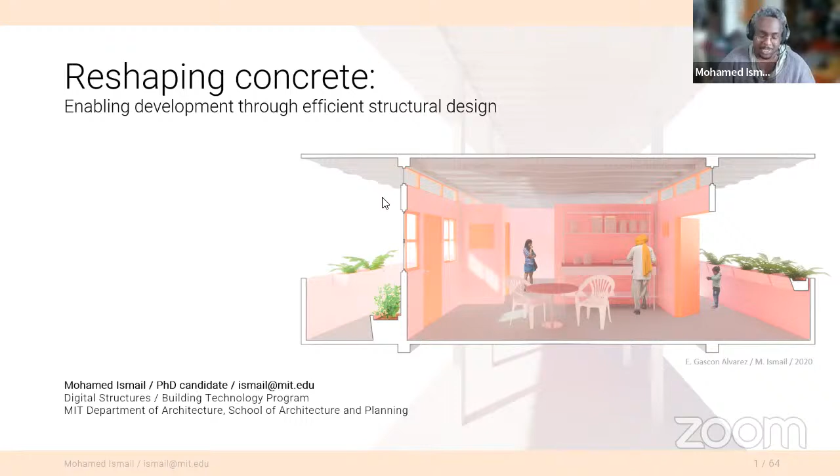And in the background, what we have is another common sight in Sudan, which is a concrete frame building with brick infill, and it's incomplete. To me, these buildings always kind of reflected this interesting dynamic of the desires for dignified architecture, yet the cost was so extravagant and outside of the means of most people living in this context that oftentimes it was not impossible to see them unfinished. So to me, they always felt a little bit like unfinished dreams.

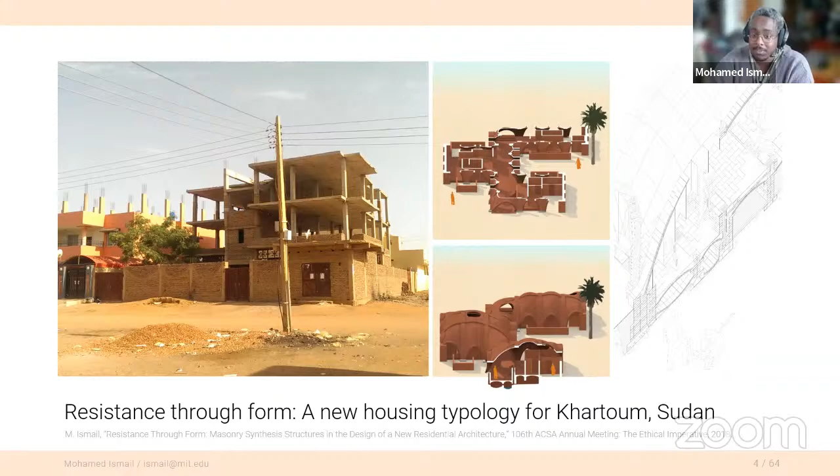And so I proposed a typology that used materials and structural systems that reflect the mechanics of those materials, but also was cognizant of the culture of Sudanese housing. Can it be arranged in a way that you have the public-private gradient, the separation of genders, and still call it something that is Sudanese, even if it doesn't look like what most people are building?

That same interest led me to my PhD research, which Zihan was very kind to introduce earlier on, which is basically the optimization design of concrete structural floor systems. And in my PhD, if you just wanted to jump to the end of what I've been up to, I've developed a shape optimization method that can reduce the embodied carbon and mass of residential floor systems by over 60%. And we're talking about multi-story concrete brick frame buildings that are going up in less economically developed countries like Sudan,

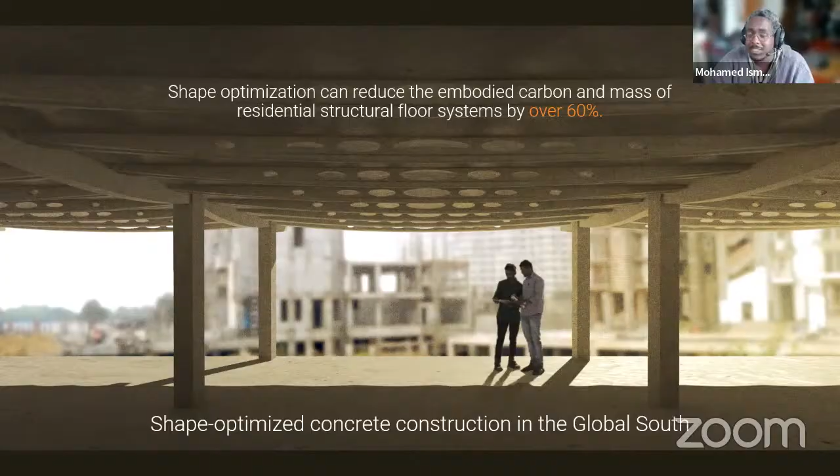India, et cetera. Some of you may be familiar with the embodied carbon aspect, that this is the carbon that's associated with the material extraction, material processing, material construction and deconstruction. And you might know that the construction sector contributes to 11% of global carbon emissions. Most of that is due to concrete construction. So 8% of our global emissions are due to cement.

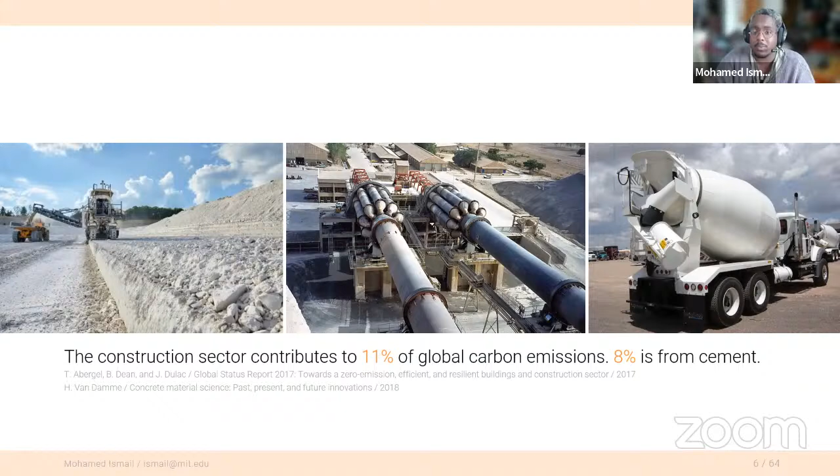And what I want to point out is that because of this growth, building-related emissions, just like the impacts of climate change, are not shared equally. In developing countries, construction can contribute 2 to 3 times as much as they do on average across the world. So with the ongoing climate crisis and the sensitivity of these regions to climate change, this does require an immediate response.

Now, in response, I focus on floor slabs, which might seem somewhat pedestrian and uninteresting, but they actually occupy a lot of space and mass in construction, especially because most of our floor systems are deployed using materially inefficient practices. This is an informal survey of housing construction that was being done in India when I started my research. And you can see that most of these structures are being built using prismatic beams and slabs, rectangular prisms.

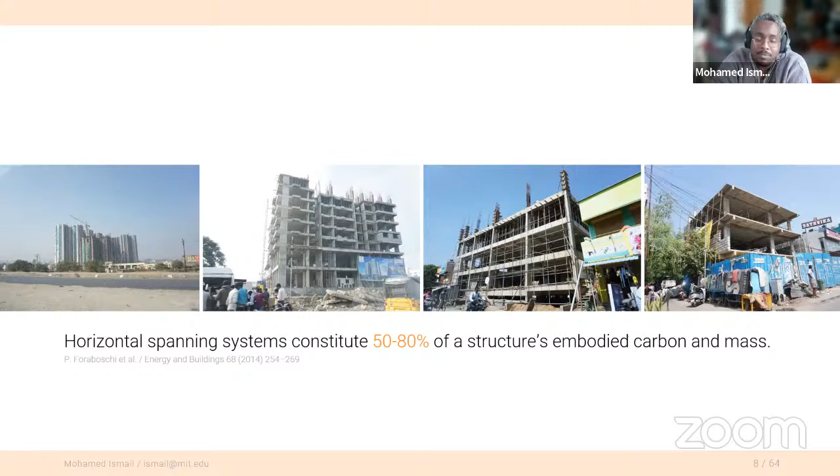In fact, they make up at least 50% of the mass and embodied carbon of a building structural system, and it actually goes up the taller a building gets, which is becoming more and more the case. To illustrate some of the arguments that I make with my research, here's a diagram of a one-way concrete floor slab that spans across 2 beams that are about 5 meters apart.

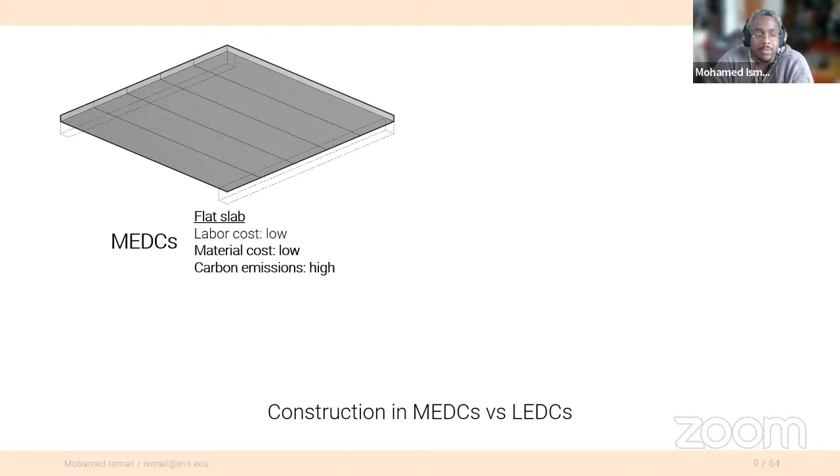In an MEDC, or a more economically developed country like the United States, which is where I reside, we build a lot with flat slabs. And that's because material costs are low, so we're not too worried about inefficiency, and this keeps labor costs low, even though our carbon emissions associated with this type of construction are relatively high. So if we were to propose a shaped slab system like this that was developed using an algorithm that I developed, labor cost goes up and it becomes far less feasible to build something like this, even though we can argue that the carbon emissions are substantially lower.

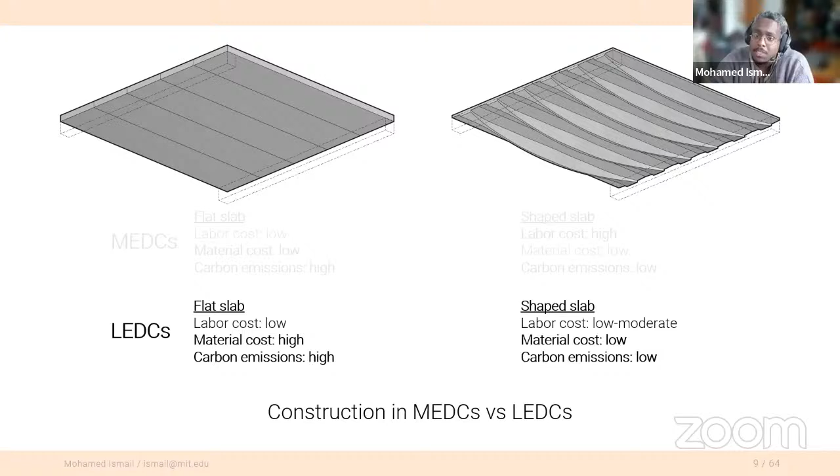Whereas in less economically developed countries, we still build using flat slabs, even though material costs are so much higher than they are in countries like the United States. And labor costs are low regardless. And so the carbon emissions remain high. And so if we were to propose a shaped slab system, labor costs might go up a little bit, which actually might be a good thing. We're shifting the cost for materials to human well-being and lifestyle and livelihood, while reducing material costs and reducing our carbon emissions simultaneously. And this is really all enabled because of the cost breakdown of residential construction.

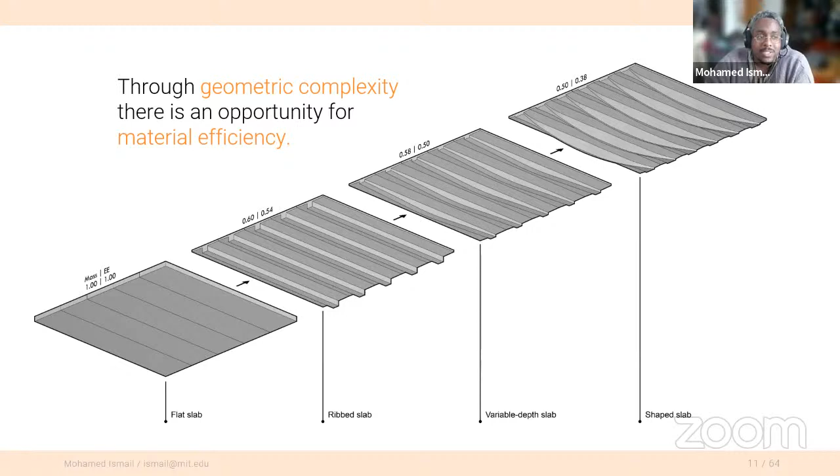In the United States, we're about 50-50 between labor and materials. But in places like India, materials can account for over 80% of residential construction costs. So why are we still building using these materially inefficient methods that were developed to reduce labor rather than material? And I argue through the research that geometric complexity offers an opportunity for material efficiency. This is not a new idea. We have a lot of industrial prototypes that have showcased how you can remove material through some efficiency to a certain extent. But these are systems like waffle decks, bubble decks, hollow core slabs.

They require infrastructure and they require a huge investment in capital for countries. So places like India, once again, where I spent a lot of my time, this is not totally feasible. They're slowly gaining traction, but there's a lot of investment up front that needs to be done to make these happen.

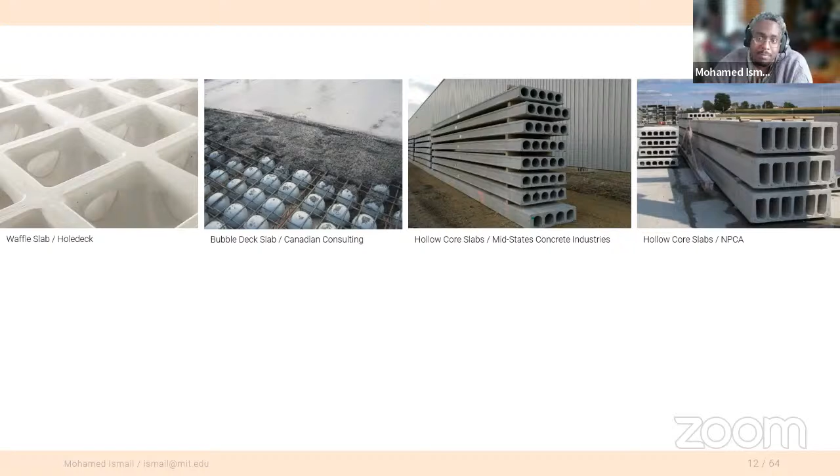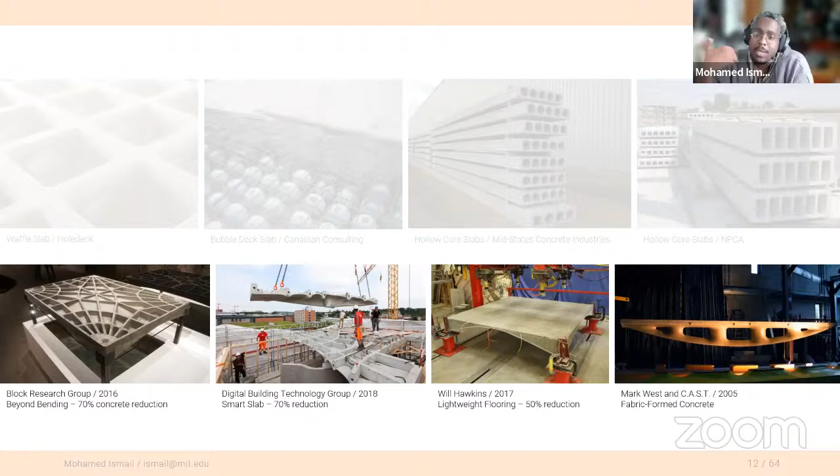In academia, there's a lot of really exciting, beautiful examples of materially efficient systems that have been developed by some of our colleagues, but they often are done using digital fabrication methods that are not available or materials that are not actually allowed by code or not standardized to a certain extent. So these are systems that might gain traction within a few decades, but not immediately accessible.

And so in response, I'm trying to do something in between. Can we do something that pushes the accessible technology and standard materials, but is still reasonable for construction in the next 5 to 10 years? And I focus most of my research on residential scale construction because that's where most of the concrete for building use is expected to go. And ultimately trying to reduce environmental and economic costs without increasing the complexity of fabrication too much beyond what is possible.

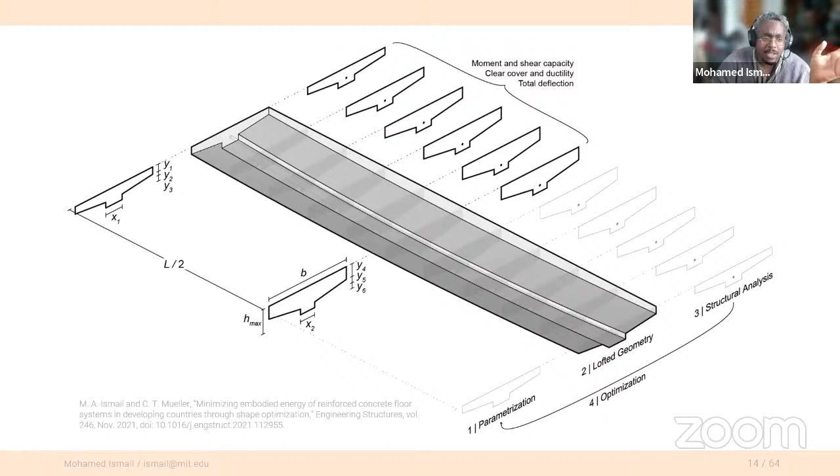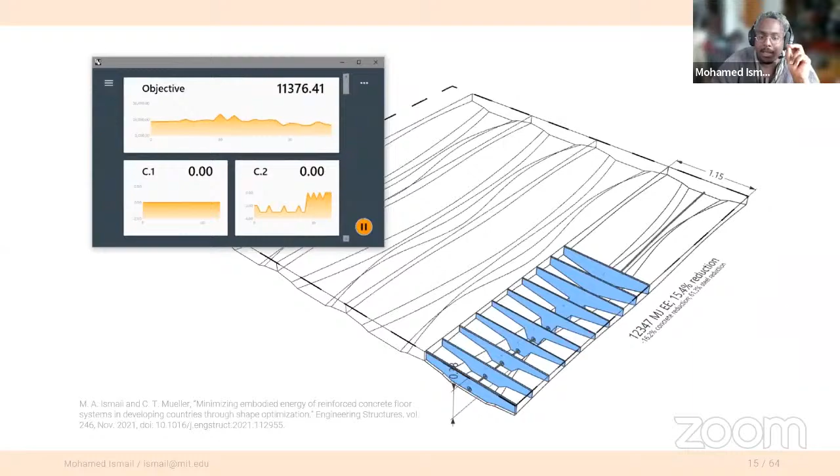The shape optimization method looks like this. We basically define geometry, analyze that geometry, and then run a constrained optimization. And the separation of the analysis and the design of the geometry allows for a lot of flexibility, but this is what that shape optimization method looks like.

And we were lucky enough to have an opportunity to build several examples of this. One of our biggest ones was a 15-foot beam in New Delhi, India, with our partners Tara, who built it and also tested it in a government lab to verify that it behaved the way we wanted. It met Indian standards and was still 50% less embodied energy when compared to a standard floor slab.

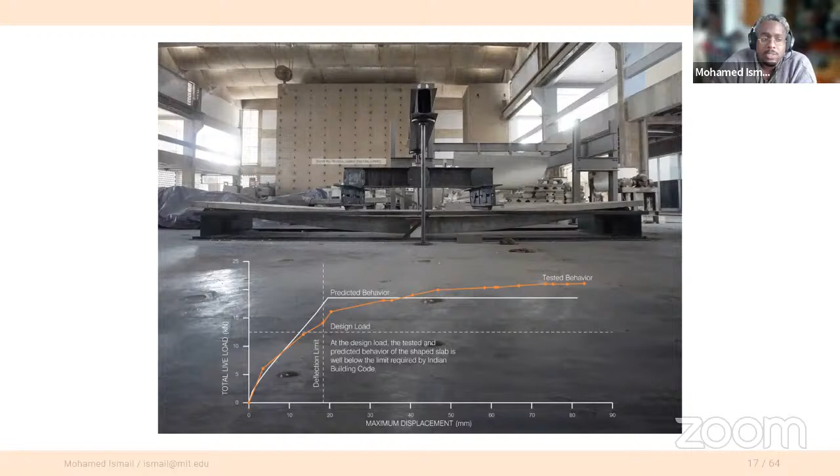And it just did very subtle shaping, built using a formwork material like steel plates that were regularly used in India nonetheless, and was substantially cheaper when you look at the actual total materials. Now we're really excited. We're getting to look at other regions. This is a proposal that we're developing in Mexico City with partners to basically make subtle changes to a system that they already use that's both precast and cast in place.

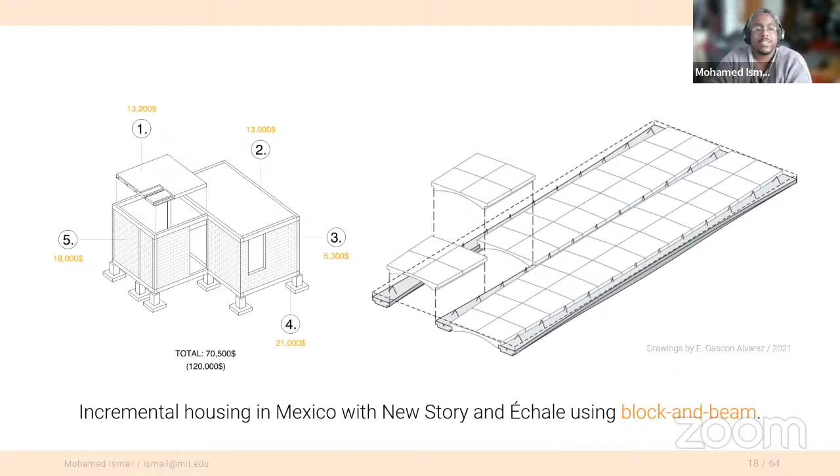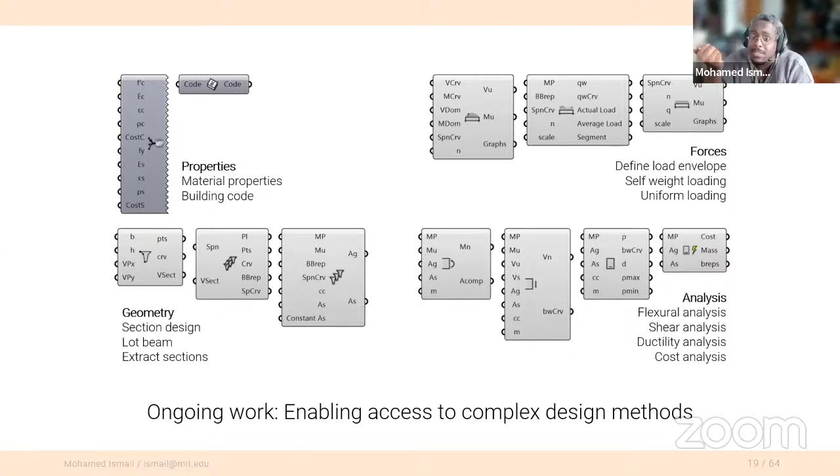I've also been thinking a lot more about how this research can go beyond the lab. Can we actually engage other people, and that means making these methods accessible. So I've developed a plugin for the analysis and design of complicated concrete structures, which means that we can pair this with things like virtual reality and machine learning in order to have predictive models so that someone who doesn't fully understand how concrete mechanics works can still mess around with the design and optimization of these spaces and understand the implications of all of their design choices early on in the process. So how can we actually include the end user in our low carbon design processes?

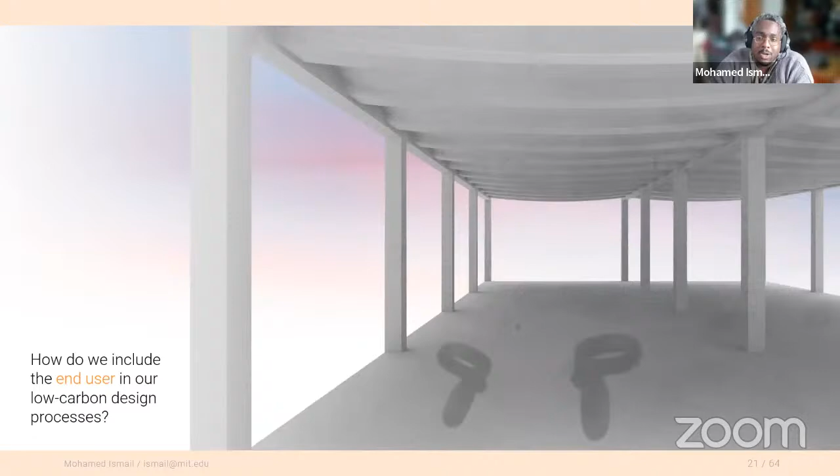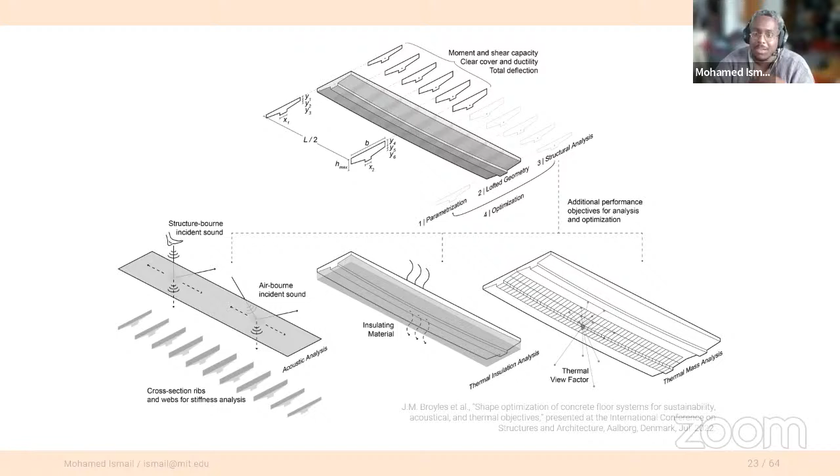It's also allowed me to take my method of structural optimization and bring in other partners who can talk about performance metrics outside of structural behavior, like thermal behavior, acoustic behavior. This is work I could not explain, but a partner in Penn State has done amazing work trying to figure out how you can optimize for both sound insulation and structural efficiency.

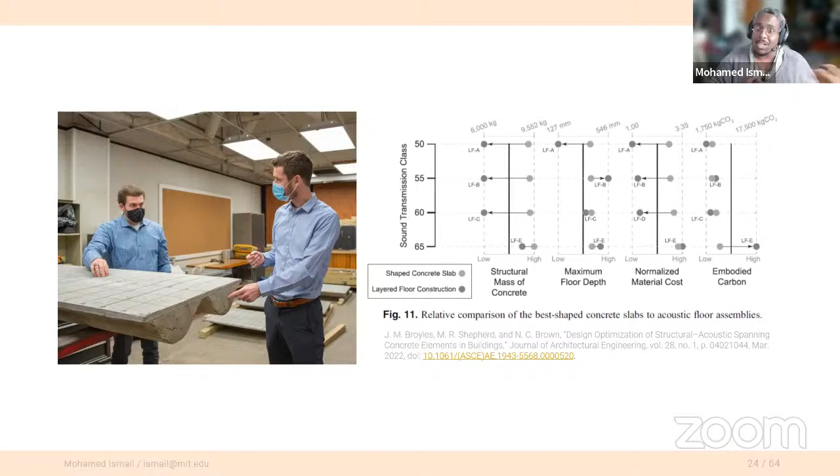Or can you do lifespan operational energy where you're using shaped concrete slabs to store thermal energy and heat and cool a building passively throughout its lifetime, where in a place like Cairo, you could actually reduce the total energy of a 50-year lifespan for the building by 60% just by shaping your concrete floor systems.

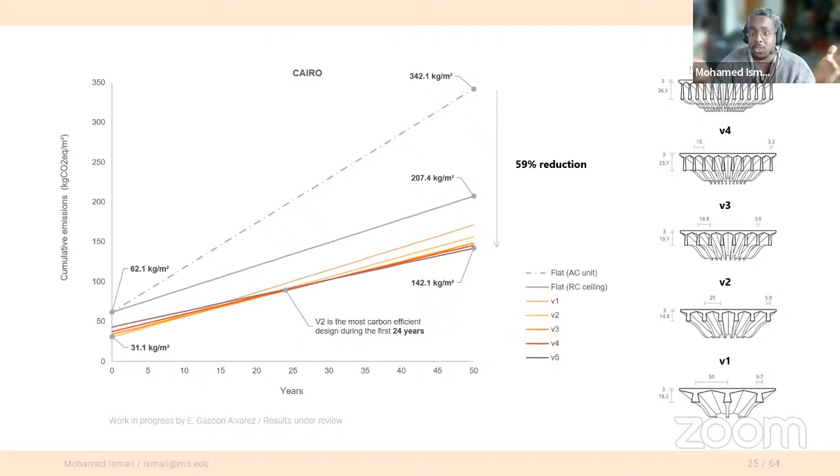So to summarize, some of the lessons that I've learned in my research is that sustainable construction needs to question our most common practices. I think that's kind of an obvious question to a lot of us. Holistic design has to occur across various performance metrics, which include space and aesthetics and human well-being. And we need to be able to work where we can have the greatest immediate impact.

And for me, that's been a lot of the developing world, but really low cost and low carbon solutions are needed worldwide, which is extremely important when we think about how there's a vast difference between climate responsibility and climate vulnerability. It's almost the inversion. And there's a wide gap between those who need help and those who get it, even in our own neighborhoods. So I think it's both in our best interest and frankly, a moral imperative to respond to the needs of the majority through innovative design and technology.

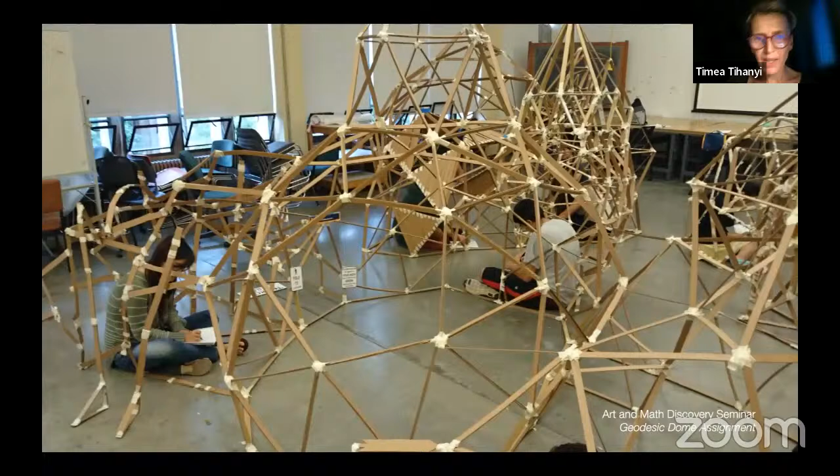Another aspect of the art and math class that we all enjoyed was a Buckminster Fuller geodesic dome project that the students were building out of cardboard and tape, and they really had to understand how structure and ideas of tension and compression worked. We also use in the classroom, and this is not an art and math class, this is just a regular making class in sculpture, ideas of topology.

So here the students are putting on t-shirts and stretching them out with internal structures, and really creating ideas of shape and volume by transforming the shirt itself.

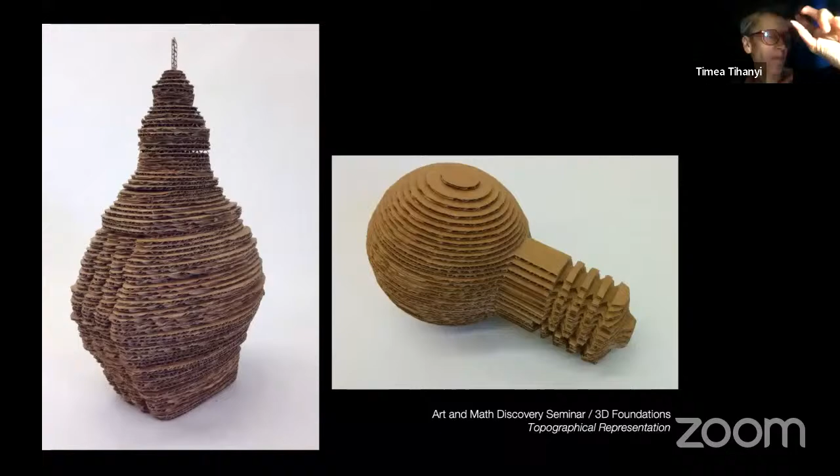Another type of project that we often do in sculpture classes is topographical representation of objects, and I've been teaching for 20 years, so this was one of the early projects that we were doing in a sculpture class.

And at that time, I wasn't thinking of 3D printing, but of course now, conceiving how an object would be built up from layers, individual layers, and what the outline of those layers might be. That is the kind of thinking that this project practices.

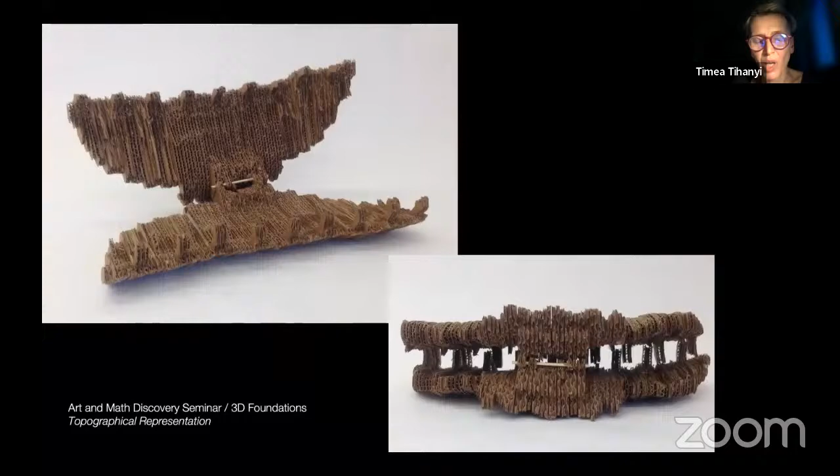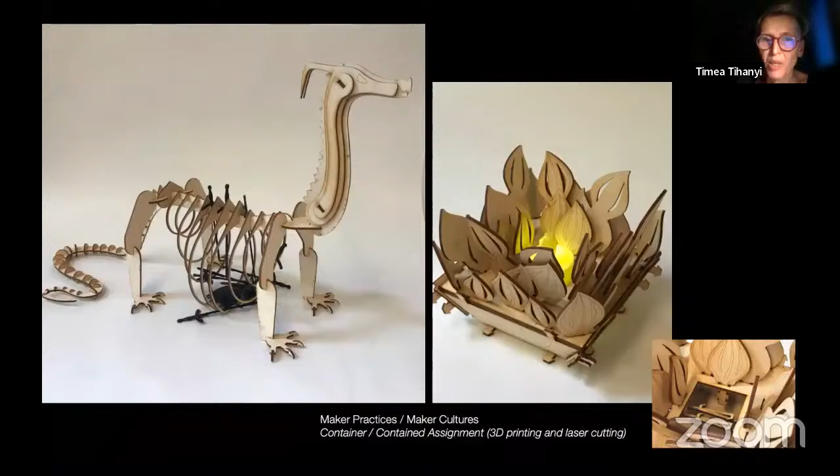So in a more recent class, which is called Maker Practices, Maker Cultures, we are using various methods of fabrication, so laser cutters and 3D printers, to do similar projects. And I really love the way the students are creating the shape, creating the volume by slicing things and joining things differently. And then lastly, this is the last batch of student projects I wanted to show you, because this actually brings us to my work.

So besides the university, I also run a 3D printing studio that specifically focuses on ceramics, and this is Slip Rabbit. The studio's goal is mentoring and research in the area of clay printing, really seeing where clay printing can be expanded into interdisciplinary, cross-disciplinary areas, and how it can be used and how it can be pushed further.

So the studio had the first students come in 2017, and we have internships, collaborations, and residencies. And we'll see some of those examples of the works with the students later.

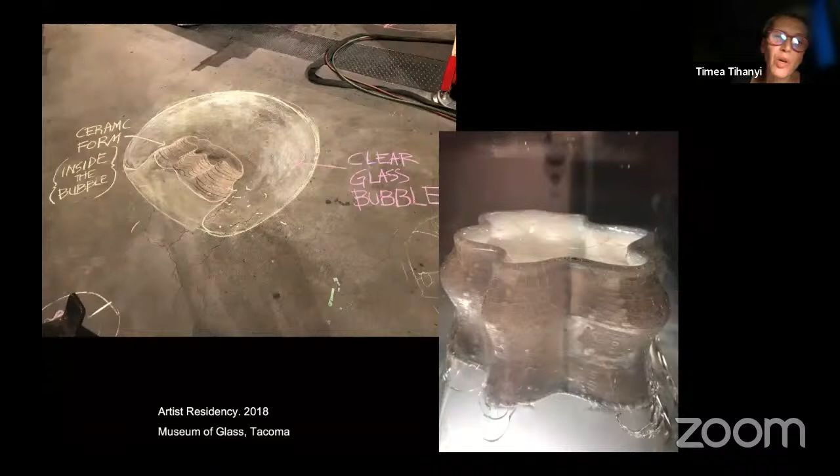But my background is in medicine, and my interest is still in this world between science and art, between perception and abstraction, between the various ways the material world incorporates aspects of an abstracted scientific world. So I wanted to show you an example of a work that I did with 3D printed ceramics, but it really goes back to some older interests of mine in how materials relate to one another.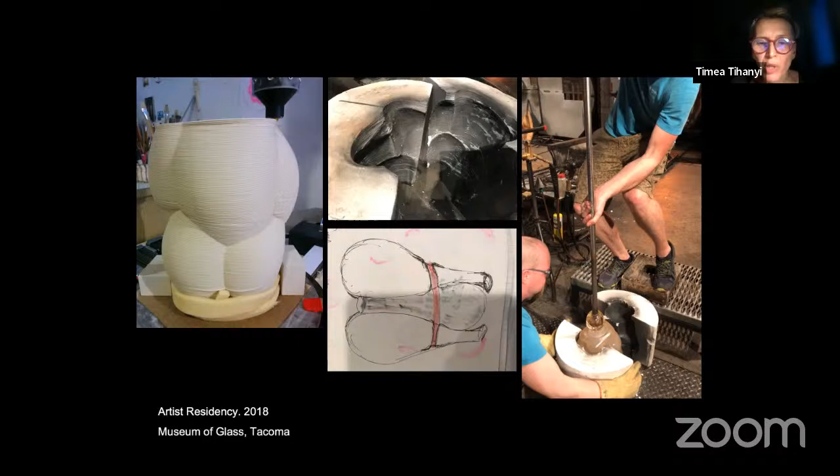And I had the good fortune to have a residency at the Museum of Glass here in Tacoma. And for the residency, I printed these ceramic vessels. These are printed in porcelain, and some of them I fired, and others I actually just took molds of, and the molds were going to the Glass Museum that had an active glass blowing workshop, and we worked with the gaffers to blow glass into it.

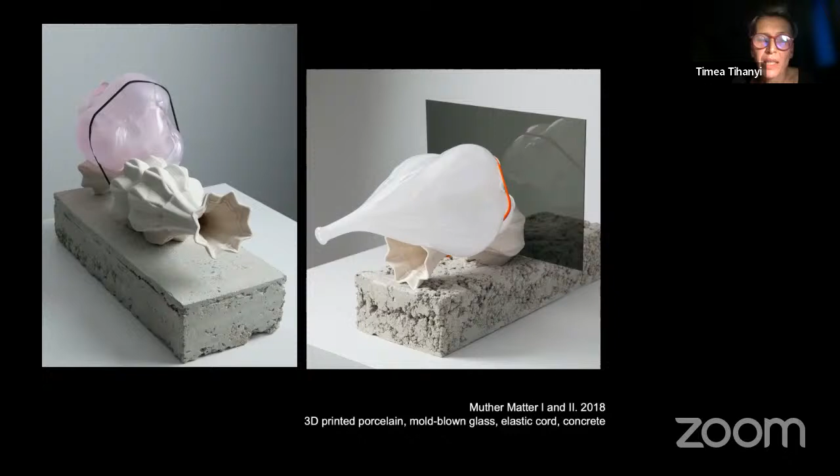So as the result, I had two pieces. One of them was in glass and the other one was in ceramic, and the two came out of the exact same form. So the form that I designed on the computer, that I printed, took a mold of, was forming both of these objects, but the objects really shaped as a result of the specific process that works with that particular material. They were really shaped differently, and I really enjoyed the tension and the combination of that.

My artwork is, I would say, probably half and half in nature, between thinking about the process, the technology, the abstraction, and really thinking about the physical experience, the bodily experience, kind of an emotional experience. So you might see that coming back in the most recent work, and I will show you some more technical projects next. But hopefully this video is going to run. I wanted to show you this video.

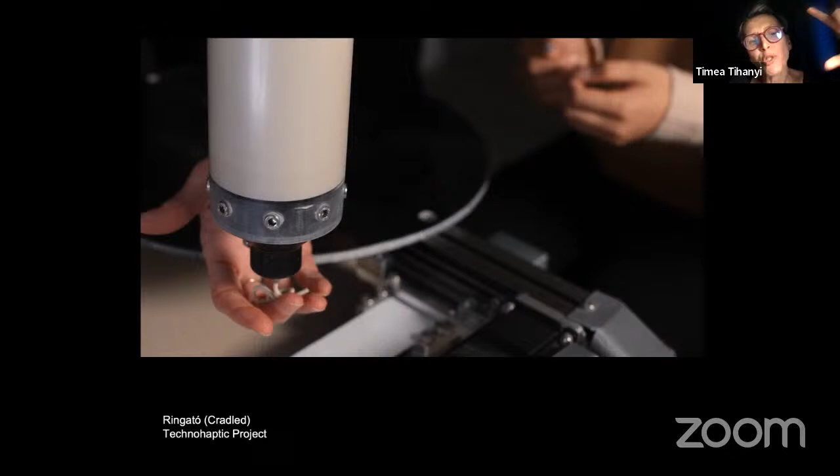This is a participatory project we often perform in the studio with visitors. And you are going to see my ceramic printer, which is a Potterbot. This has the tube set right above the nozzle. The tube is filled with maybe cream cheese consistency porcelain clay, unfired. This is a continuous extrusion.

And the machine is not super sophisticated, but very, very reliable. And what happens here in this particular project is that the participant acts as the building platform. In fact, the form that's being printed is a sphere. So it could not print. It would not make sense. It could not stand without the hand of the participant.

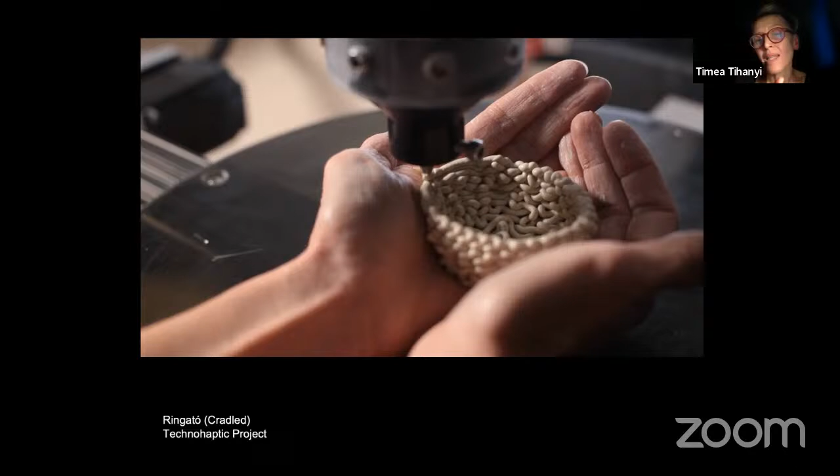So there is a collaboration, there is this kind of continuous dialogue, there's a dance between the hand and the person making it and the machine. And I really offer this as kind of like a symbolism, a metaphor for the rest of the talk.

So I'm just gonna skip ahead and show you a project that is not mine in origin. This is Henry Segerman's work of the 5-cell beach ball cube, which is showing like the 3-dimensional representation of a 4-dimensional object. And I've worked on a math art project with another mathematician, my colleague from University of Washington, Jayadev Athreya, where we interviewed various math people about the research that they were doing. That's how I met with Henry.

And I was really interested in his way of conceiving an abstract idea, which would be like a 4-dimensional object, and using the 2-dimensional representation, using the shadow, using this projection as a way of allowing us to visualize it. So I asked Henry for the model, and he created this on, actually, I don't know the software, but he created this and printed it out very small. And what I wanted to do was a really large porcelain version of it.

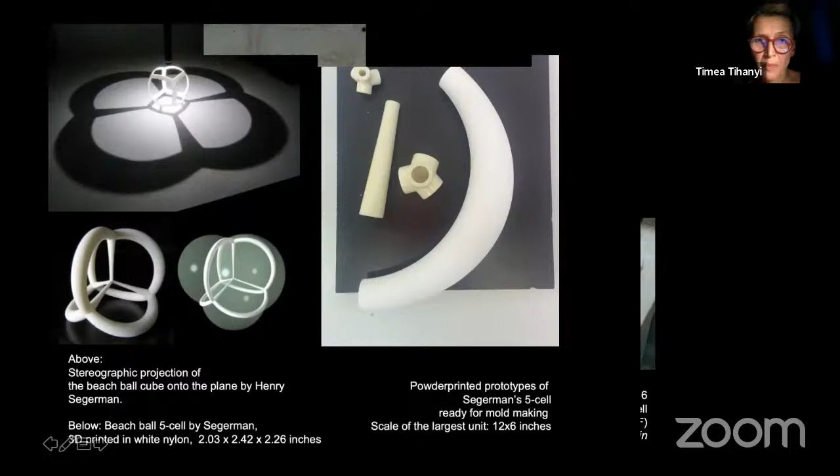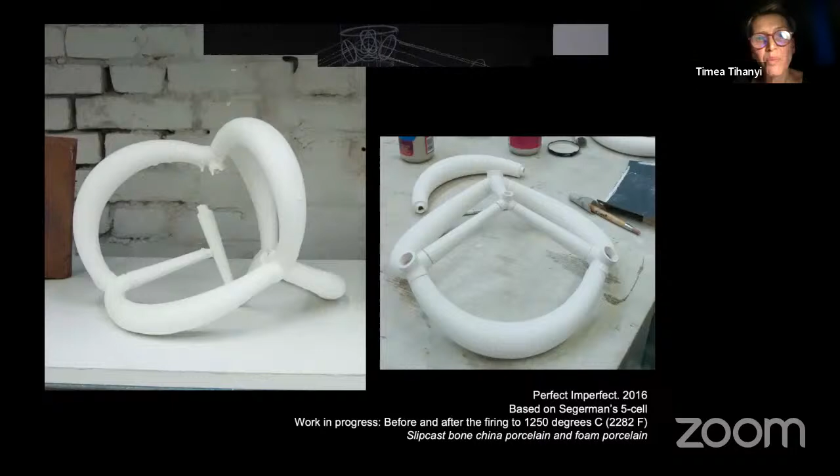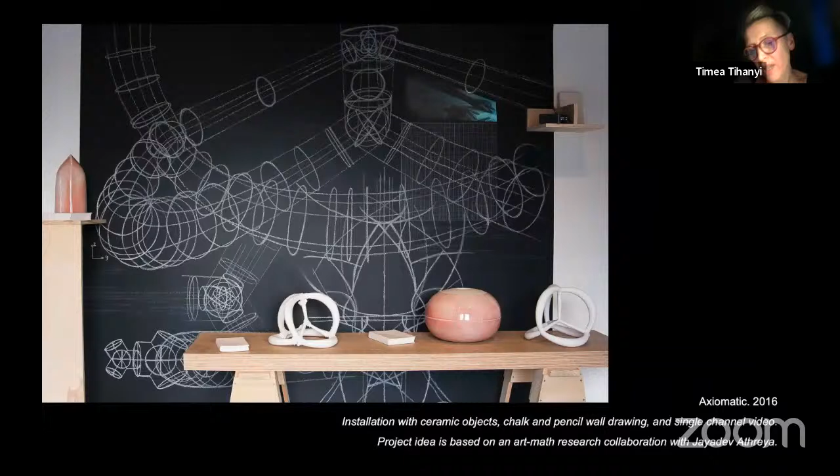Yes, so the parts were cast, I built them together, and then kind of the physical reality of ceramics took over. In the firing, everything kind of moved and changed and slumped. So I ended up with pieces that were very perfect representations, and then pieces that were a lot more imperfect representations. And this went into a final installation that showed both the Rhino structure of it and the actual objects.

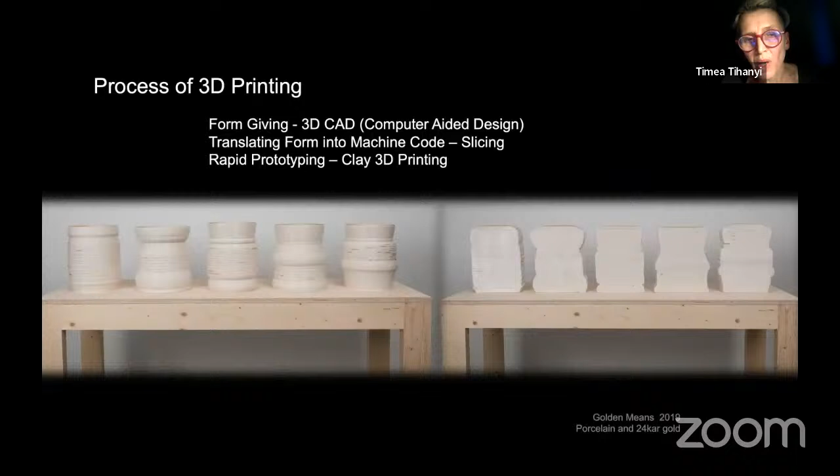So just maybe a little bit about 3D printing, because I don't want to assume that everybody's equally familiar with that. And it will have to do with some of the later projects that I would like to talk about. Basically, the process of 3D printing, there is a form giving process, for most purposes, for many people, this is some kind of CAD. And then there is a translation process that is done in a slicer program, translating the geometry of the object into a machine code. And there is the prototyping process, so the actual printing.

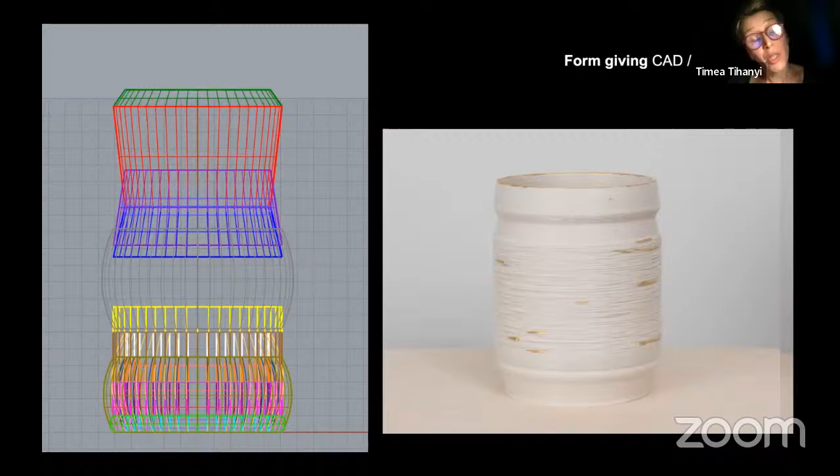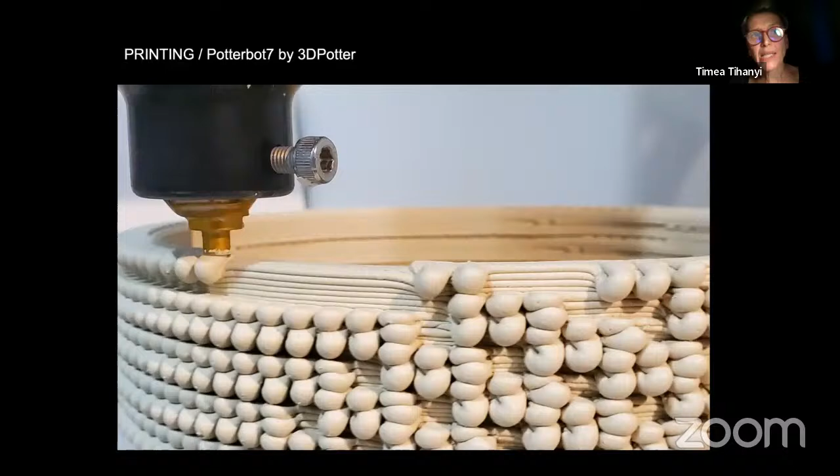I use Rhino a lot, and I kind of use it in a very low-tech way by creating volumes of various sorts. So here you can see an example of a vessel, actually a family of vessels that are made of tori and cylinders and truncated cones, just stacked together in various ways. And each will give me a different shape. Then the translation happens with the slicer, and then the printing happens with the Potterbot.

And from very early on, when I started working with 3D printing, one of the most interesting aspects of the ceramic printing became the point when the printer, the nozzle, leaves the perimeter of the object. There is a drop, there is a loop that happens, and it really is only dependent on the size of the extrusion.

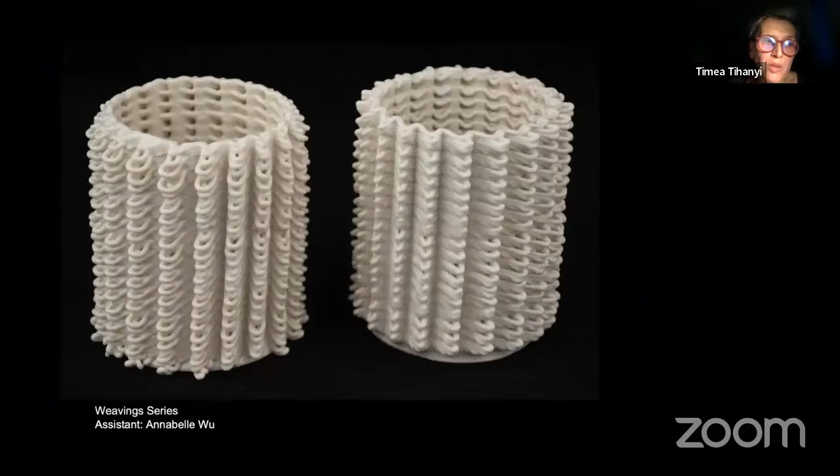So the first objects that I have created, and this was 2017, not very many people were 3D printing with ceramics at the time. There was no formal kind of literature, like guide to follow at that point. We were kind of experimenting with the students and seeing what happened. So the loops happened. And very soon, it became the most interesting thing to me to kind of try to pattern these loops in regular fashions and also in irregular fashions, and then see the kind of textures that could develop with that.

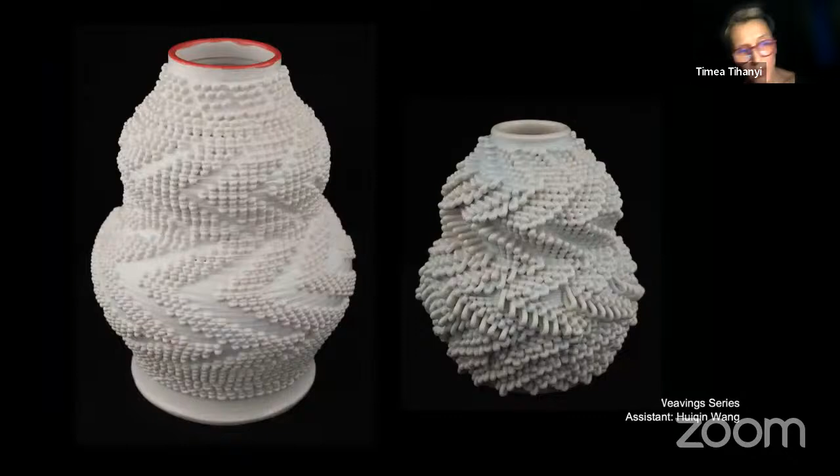So the way in the studio that we work with the students is that every student comes from a different background. We have a lot of people from engineering, computer science, mathematics, art and design, architecture sometimes, and they have their specific interests, what they would like to do. We usually develop a workflow. I conceptualize a project, and then the students kind of build it, and all this information kind of flows in and out of the studio, allowing other people to also use some of the research findings.

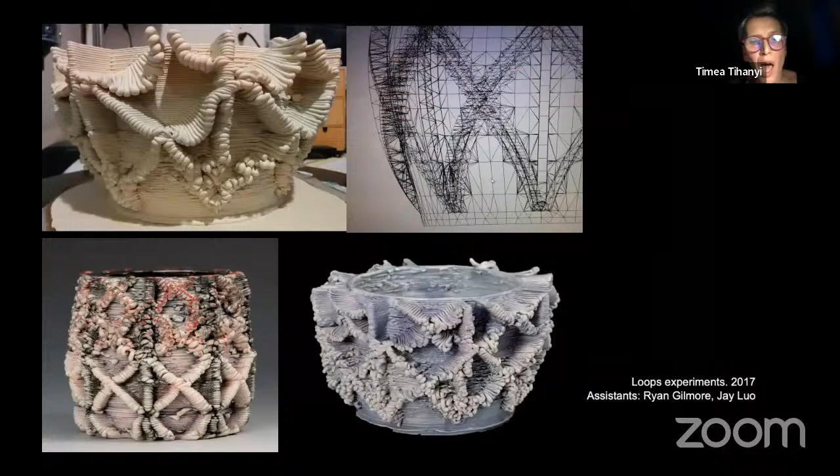So with the loops, one can go like super extreme in size, and these become almost like these wing-like structures that would literally be like 5 centimeters, 2 inches long, and would have to be resting on a support, usually my hand, in order to hold up. Many of the things that we have found during these years were the results of accidents. With clay printing, things are never as predictable as with regular printing.

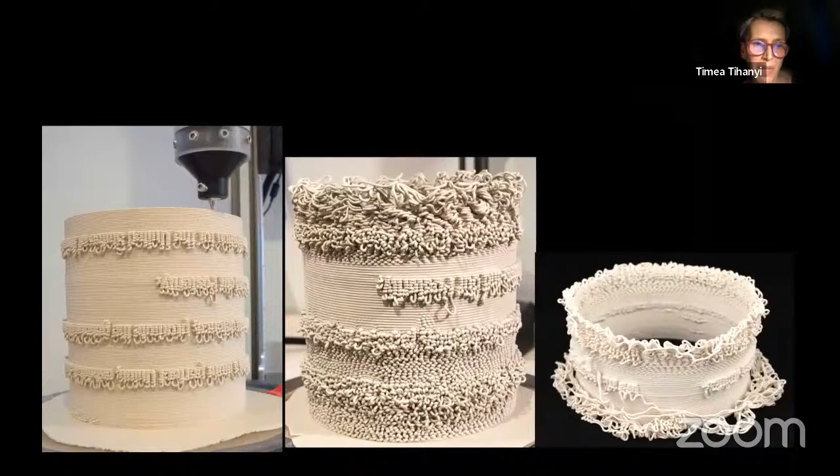On this image, you see two different prints of the same file. So on the left is where the layer height is gauged to be kind of normal. And then in the middle, the layer height is set at maybe double of that. So it's kind of extreme. The extrusions don't stick together. And the most interesting thing is when these start falling apart and crumbling, and we can sort of save that all in one.

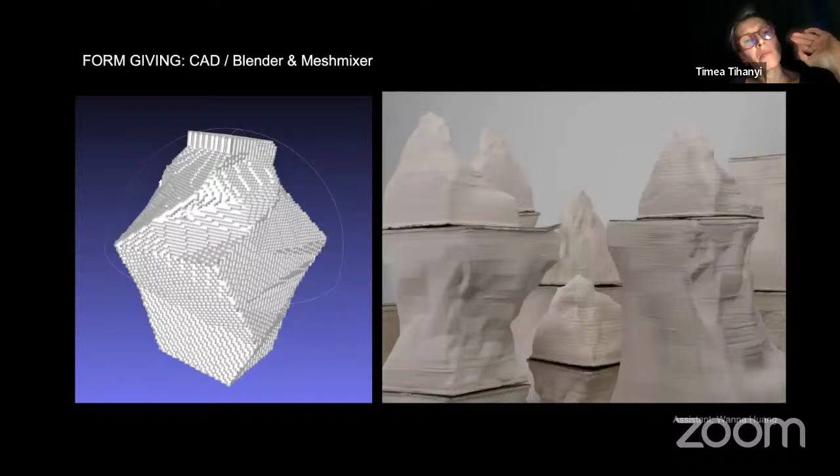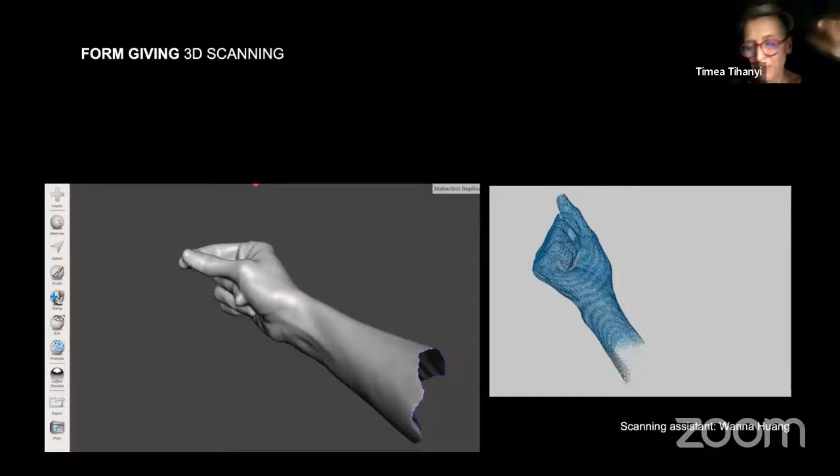So I mentioned that I work a lot in Rhino. Another way to work is to work with meshes, which I don't tend to do as often, but for this particular project, we did use meshes because we were going off of rock formations and stones, found stones, and worked with the meshes quite a lot. Another reason why I work with a mesh often is now we have 3D scanning capacity at the studio, so there is a lot of mesh fixing that's going on for us.

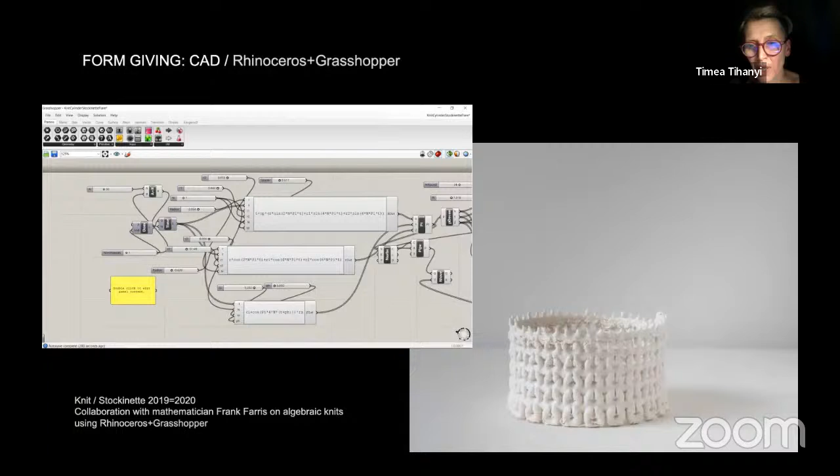A third way that I work, and many people working with 3D printing work now, is Rhino with Grasshopper, so using parametric design. And this is a collaboration that I'm showing here with a mathematician, Frank Farris, on algebraic knits. These are using the Fourier series to create the loops that will weave in and out, under and over one another, and create these knitting kind of textures.

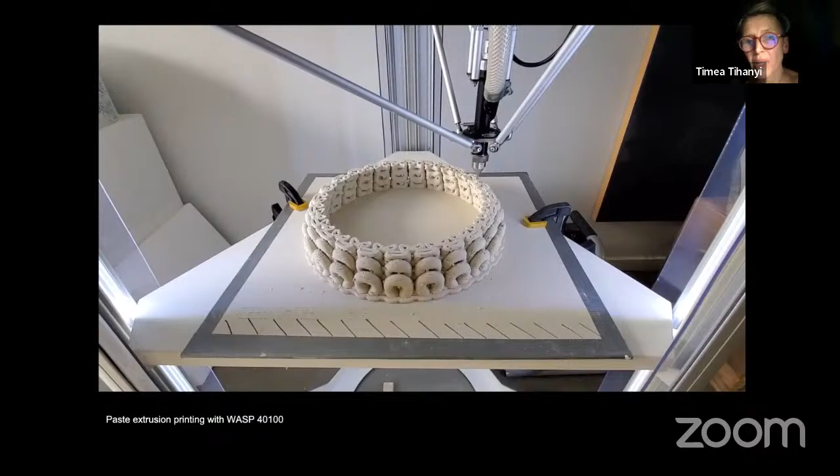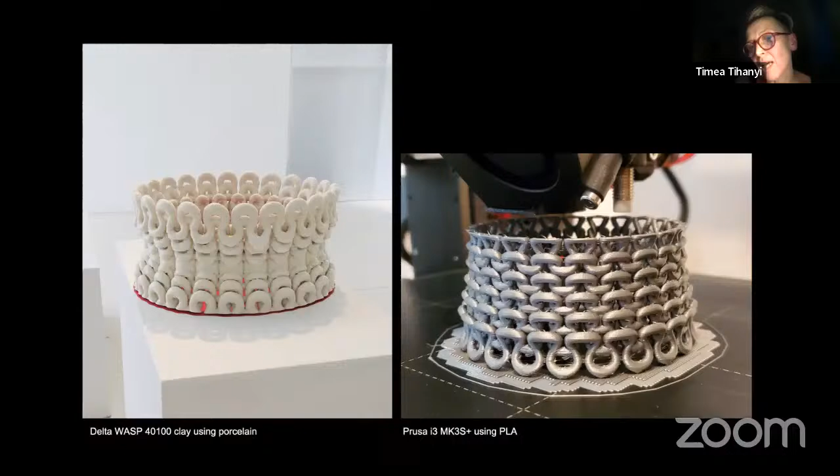And here you see the second printer in the studio. This is a WASP 40100. It's a much bigger machine, a much more sophisticated machine. It's a Delta printer where the three arms move up and down on the belts. And this is able to stop the extrusion, retract, move to somewhere else, and continue. Here you see the exact same object printed in porcelain on a scale of 45 centimeters and on the scale of 5 centimeters. So there's quite a difference in the resolution and how everything works, or it doesn't.

The things that are becoming more fascinating to me recently are sort of hacking the G-code, editing the G-code, doing things with the G-code. So I'm going to show you a project that I worked on with a designer, a colleague of mine, Audrey Desjardins. We call this project the Listening Cups because we are using sound information from various environments. Some sounds are really loud, some sounds are very varied, and using the G-code of the cup as it would be without anything.

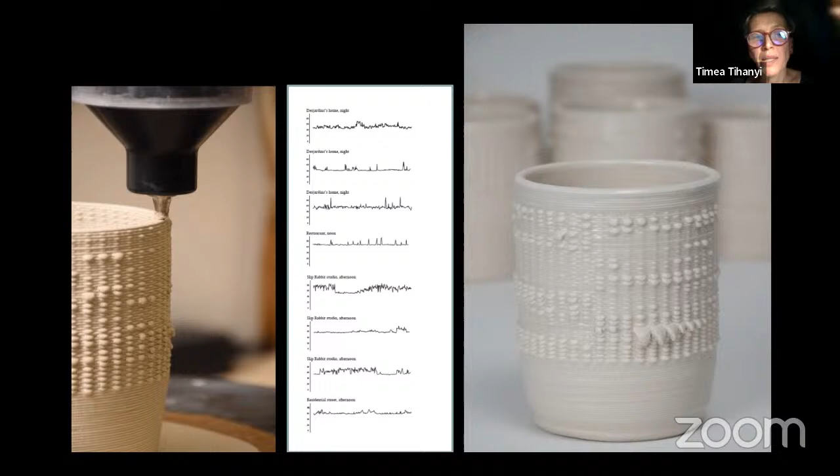And because neither of us really knows how to code, we were using it just as an Excel table and combining it with the sound data. Basically, what's happening is where there is sound data, we are taking into account the amplitude of the sound and then translating that into a duration of pause on the printer, which was a very simple technique, but gave us these bumps that corresponded to the sound volume.

So using that same idea, but maybe a little bit more math and the Python code by one of our students, I was sort of revisualizing the sound detouring the printer, the nozzle, by choosing one out of the four possible alternative locations. So basically we decided to create sound ranges, and each range corresponded to one of the four possible new directions, and it would send the printer into those directions as it encountered the coordinate point.

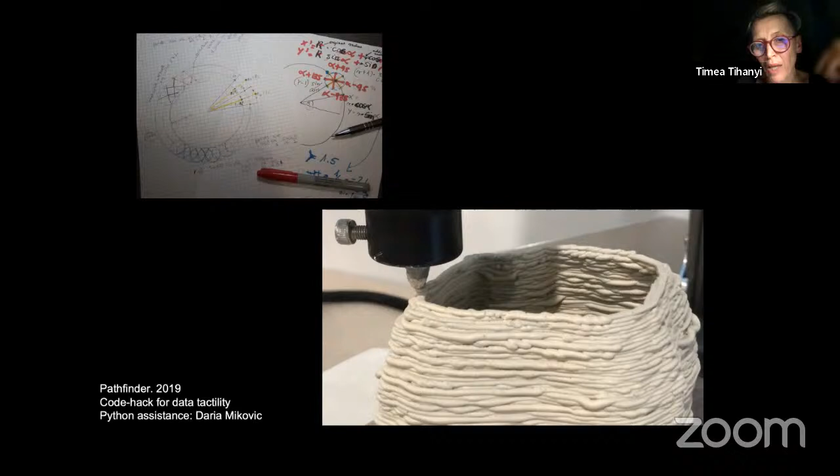And these are the resulting vessels. So in neither of these pieces is the form actually the result of the sound. The texture is the result of the sound. The form existed, it was translated into a G-code, and the sound was added as sort of a texturizing element.

And this, the most recent collaboration with Audrey Desjardins, is this project that we call the Inner Ear. We are working on it with a bunch of students, forming a research group. This is a smart porcelain object that will collect vibrations. The vibrations are both translated into a light that gives the user feedback that the system is on and collecting, and also will create these cylindrical shapes as replaceable parts on the object. So the user will give us their data, we will print it onto the cylinders, and then we'll return it to the user, who will keep using it in their home.

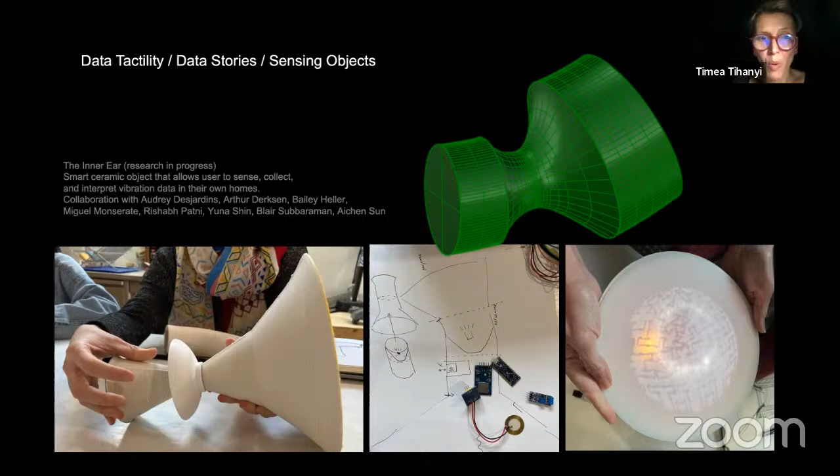So I would like to show some mathematical projects, and I will talk about the most recent exhibition. And the math projects really could all be collected under this idea of iterations.

I became very interested in using very simple rules for creating complex systems. And when I went to talk to mathematicians about it, they recommended that I look into the elementary cellular automaton. Stephen Wolfram did a great job classifying them and writing a lot about them. So I'm not going to attempt to do the same, but for those who may not be familiar with that,

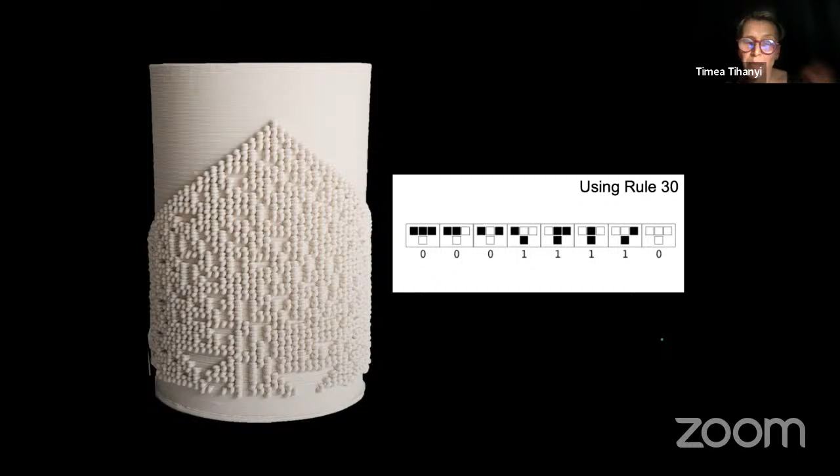So I was very interested in making this patterning tactile. Here is the vessel that I created with that. And in Rhino, this is really just a combination of a large cylinder and a whole bunch of little blocks that are stacked together. And this is what it looks like on the printer.

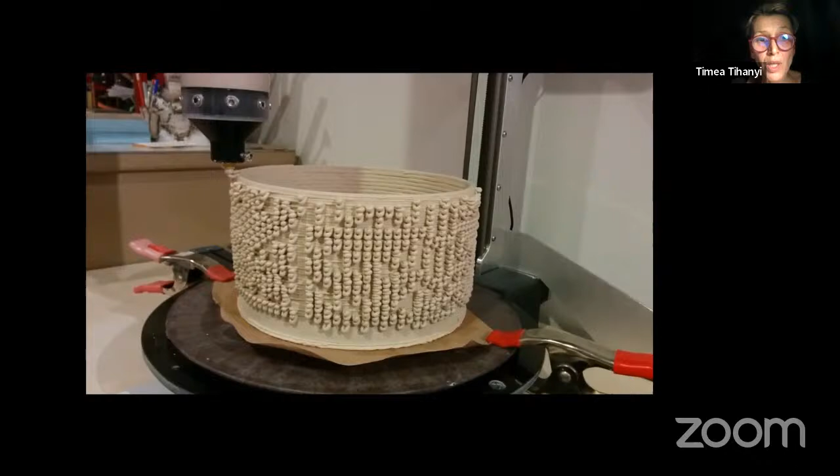So figuring out a method for this and figuring out a method for printing, that's one of my interests. But in the case of the cellular automaton and a lot of these iterative processes, what happens, how can you regulate the system, what are the rules that are necessary, how additional rules might change what happens with the pattern, are also of great interest to me.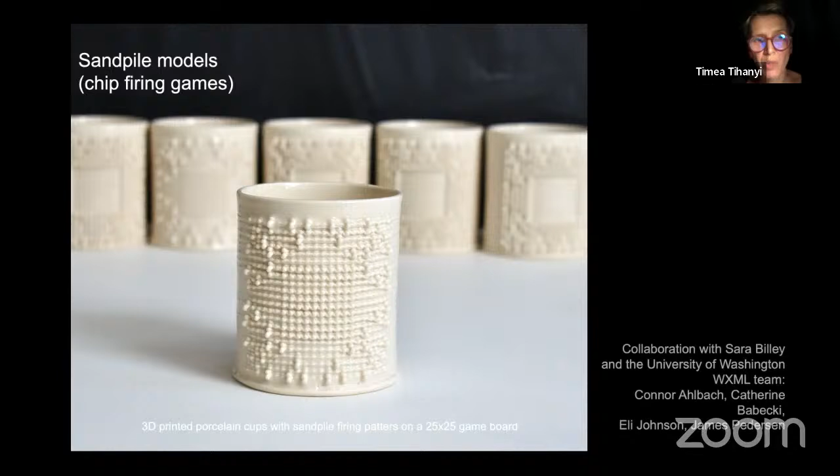And that work led to another research collaboration. This time, this was a math research group of math PhD students and undergraduates. And we were working with another type of creating complexity. These are the sandpile models, chip firing games. These are amazingly complex patterning systems that you might imagine as having a gridded game board into which sand is being poured. The rules have to do with the state of saturation, how many grains each cell could hold, and when it is going to start spilling into the neighboring cells.

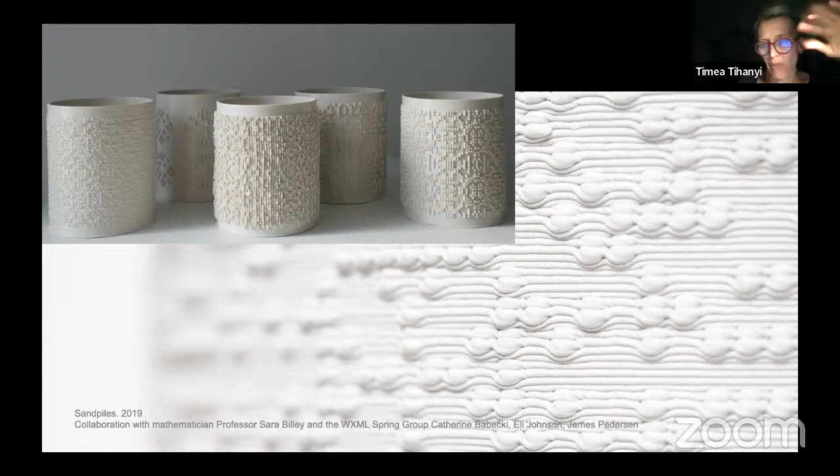Okay, that leads me to the very last thing that I wanted to show you, and this is the work with embroidery patterns. In Hungary, where I'm from and where I am right now, the embroidery has a huge importance, a big cultural history. It's also very politicized. There is symbolism in the embroidery, and I'm talking about cross stitch, which is also based on a lattice. That is also very politicized. And I'm happy to talk about that later.

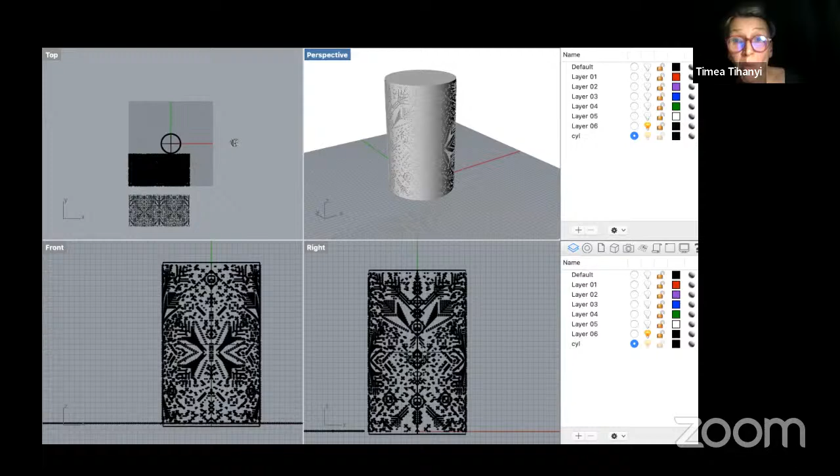But what I'm doing here, I'm collecting these historic patterns. They are very simple, usually flower shapes, maybe star shapes, and I'm putting them into Rhino and starting to do these symmetry manipulations, transformations with them, and I get great complexity. And what's interesting is that in the complexity, there are new patterns that emerge.

And I tend to think that this is the way that generations and generations of textile artists, or people working with tiling patterns, architectural tiles, would come up with the newer innovations. You pick some rules, you start repeating them, you're seeing the pattern develop across the surface. For a while, I was printing them on cylinders because that lets me see the pattern better.